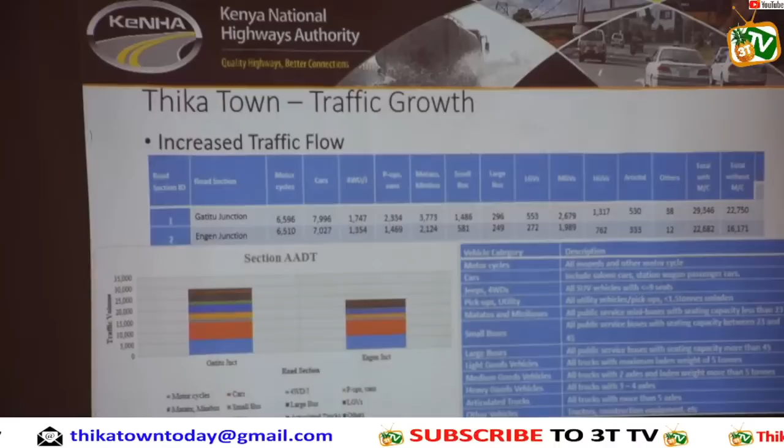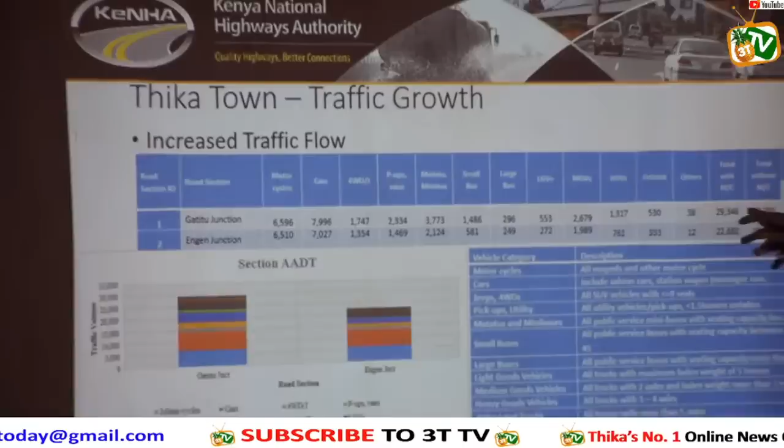Now, I want you to concentrate your effort, especially from here. The data that is very critical for an economy is the data from here to here. Now, we are proposing the design. We are proposing a Thika interchange.

We have full clover. Full clover is all three - if he's going to join, he has to pass. Then he can join like that.

The alternative, going to Thika town - this guy goes into Thika town, this guy comes. So what a full clover does is when he's coming like this, he's passed. Going into town, that's the next clover. We have this one.

Yeah, the arm is already taken care of. There's another movement here. Anyway, full clover has all the clovers this side, clover, clover, clover, so that they can access. If you want to go to Thika and then to Kenha, you'll need a slip like that, or you can come and turn, go back, turn. You can come from here, instead of going back like that. So, yeah, eight independent motions.

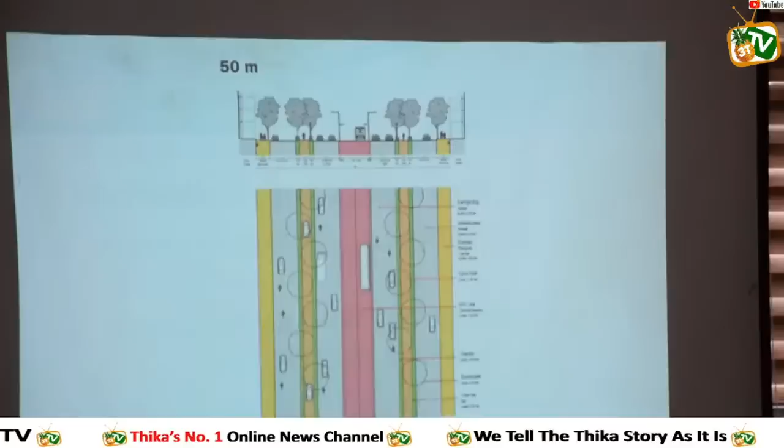The estimated cost for the interchange is 2.5 billion, and the construction of the dual carriageway is an estimate of 3 billion. And this is the design that we are proposing. I will go over it again.

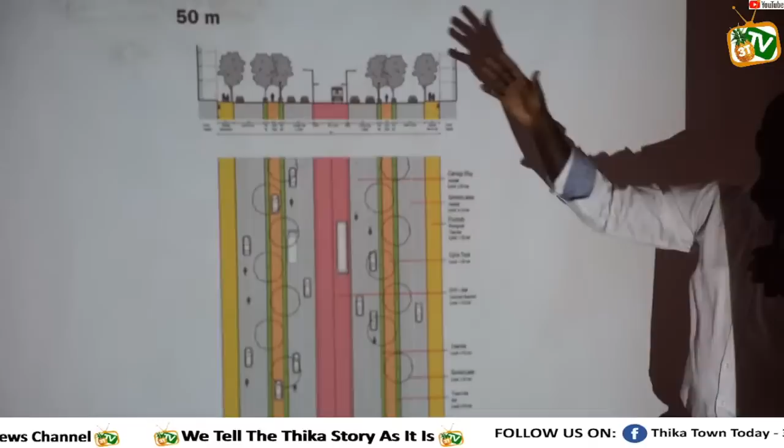We are proposing a pedestrian walkway outside, then a service lane, two vehicles, two lanes, both ways, to serve the various markets. We are proposing to take only 50 meters, though we have greater than 50 meters of reserve. Then we are proposing two lanes for the bus, and two lanes both ways - one for coming, one for going.

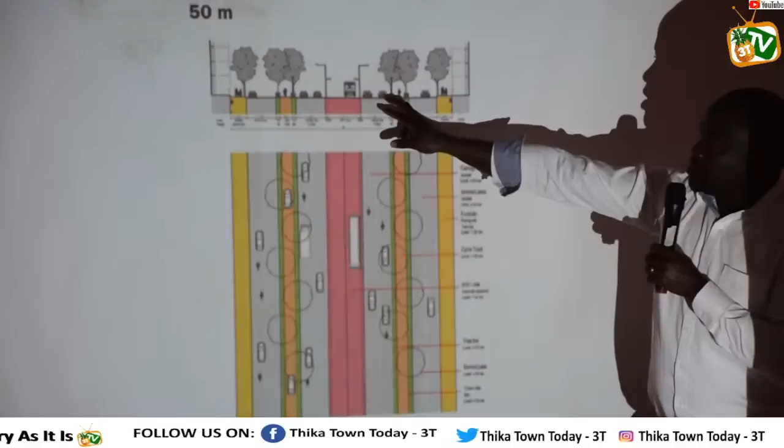This is an overview of how the lanes are laid out. This pedestrian lane may be too narrow, so it may be shifted to this place, but that is to allow the other vehicles to go. This may be a barrier, but this is the scheme we are proposing to have there.

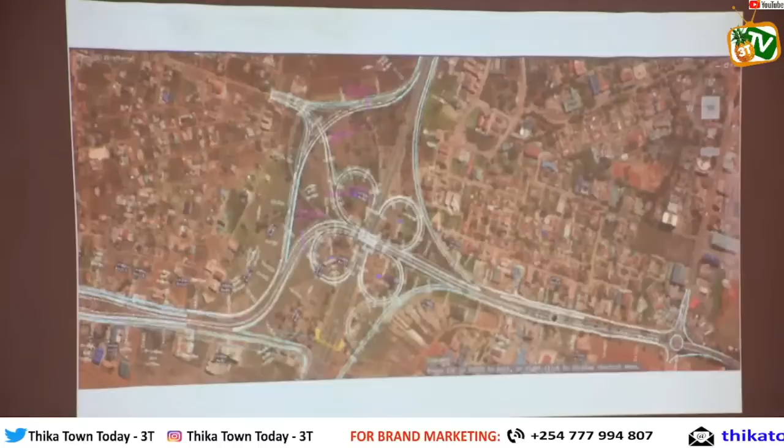This is what is proposed. There are routes to be done. This is Gatito Junction - what you know now is the big roundabout where there is traffic. This is what you know now. This is the only thing that is existing.

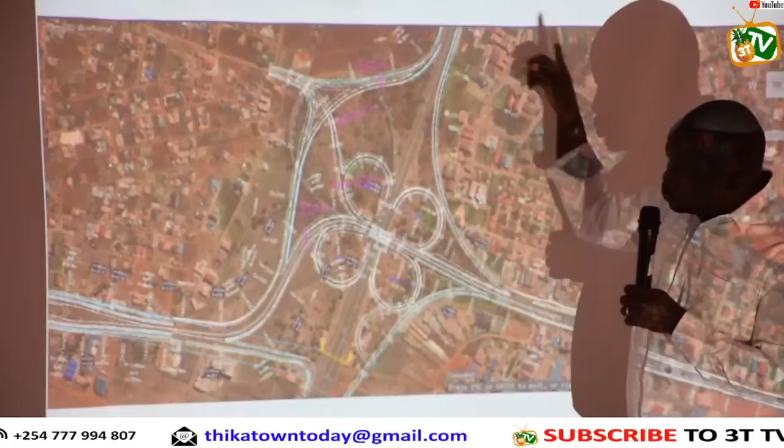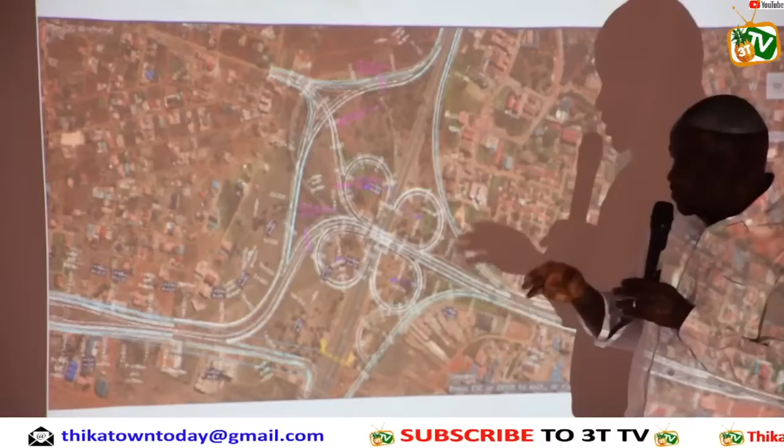We are proposing to reduce its curve so that the person coming from town reduces the curve and can go in. Then the person who will be going to Kenol from town will come, use the slip road and go into Kenol. So both ways are taken care of, and both streams are separated. The person who chooses to go back to Thika Road can take a U-turn, go up, come back.

This stream is existing, this side is existing. This side is not existing, this side is not existing, this is not existing. This stream here is existing. This slip road, we are proposing to move it. The slip road now is narrow.

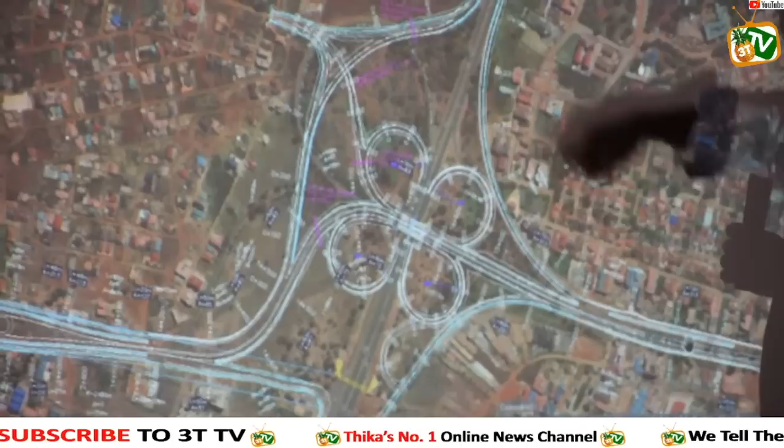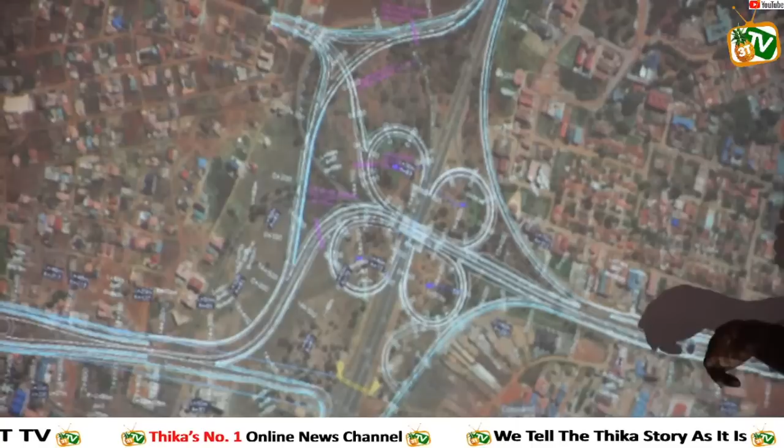We are proposing to move it a little further out so that you can come from Thika direct to Kenol using the slip road in this manner. You can also have the option of going here - different two means of accessing the same place.

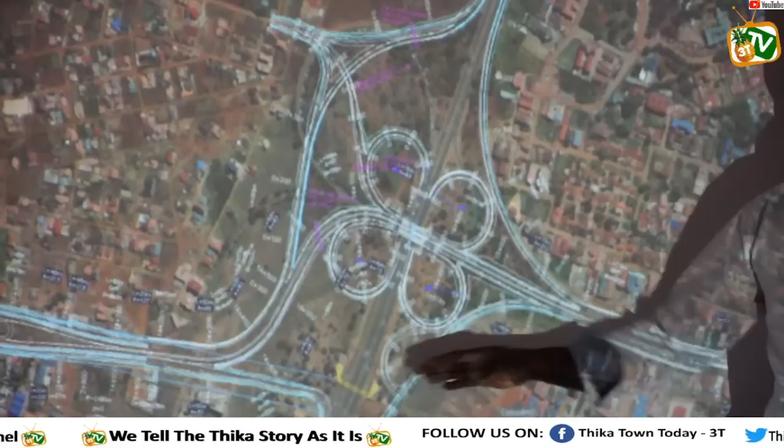We are proposing the improvement of additional access up and below here, and we will set this out on the side so that you can appreciate them. We are also proposing a pedestrian crossing so that pedestrians can cross, just after where they are selling pineapples. At these other locations, no pedestrians shall be allowed because we will be elevated.

There are 6 levels of service, from A to F. A means free flowing, like an expressway - you leave from your house to the place where you're going without stopping. F is where you stop and wait. What is currently happening...

As you get into Thika, at any time of the day you get a jam at that slip road. What we are proposing is a level of service B, where vehicles can go fast and people can access.

The objective of a highway, I need to clarify, is to provide mobility, not access. A highway should allow people to move from one place to the other - from Tanzania you go to Uganda. That's why we have provided A1. You come from Isebania direct to Nadapal - the highway should facilitate you to move very fast.

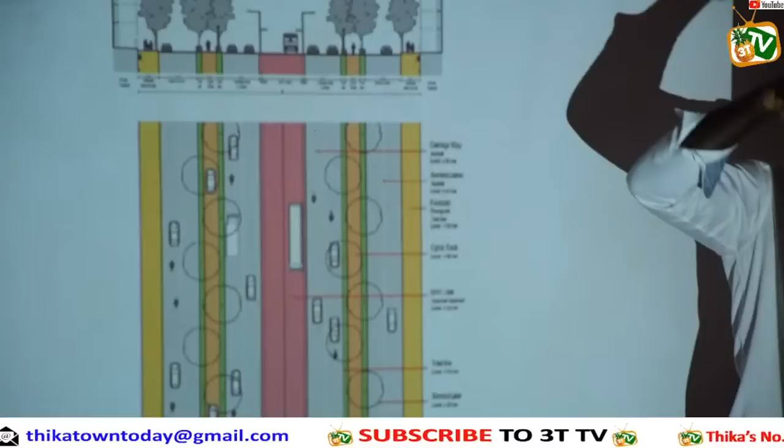This is why we are removing bumps and so forth from the highway, so that people can move fast, and we are not intending to slow down even on this one. The express sections, these two lanes, will allow for fast flow of traffic, because traffic intended to go to Garissa - why should it stop in Thika? It should not stop, it should proceed. These two lanes will have no bumps, express. Then the bump can be on the service lanes.

On the service road, we are proposing to provide bus bays and bus stops at designated locations. Now, why do we shift them? At the junction, for example at Gatito Junction, this is currently the place where matatus stop. It is not proper that matatus stop at the same location where other vehicles are turning - they will cause conflicts of stoppage.

This is why we move the stage either a little distance behind or a little distance after, and request that as matatus are offloading passengers, please move to that location. The problem is, if you create turning movements and stopping movements at the same place, you cause conflicts of traffic. This is why we avoid those ones, but we will do this very well.

Now, let me talk about BRT implementation, which we have proposed here, and about Thika Road implementation, which I explained yesterday - why it is not possible at the time when we are doing a project to normally install all of the infrastructure, because sometimes the costs are prohibitively high.